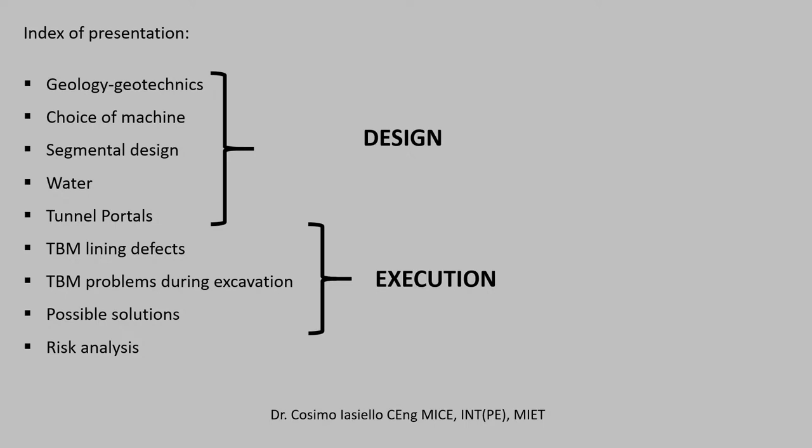Okay, first of all, the geology. I am a doctor and civil engineer. I have a background in geotechnical and structural engineering, so I'm not a geologist. But geology is not only an input; it's the input. It's the most important data we can have for our design. From the geology depends the choice of machine, the ground pressure, the inflow water, and all the possible problems we can have during our execution of the tunnel, during our excavation — everything is related to the geology.

So in this case, we have to understand the medium we are going to excavate and also its behavior, not only from a macroscopic point of view, but also from a microscopic one, in particular relating to the mineralogy of the soil and the geology of the ground.

This is directly related to the construction. If we want to avoid any problem during construction, we have to read very, very carefully the geological data, and we also have to be assisted — and this is very important — by very good and expert geologists. Everything is there, and the main thing we have to understand is how and when to implement the different geological models and different geological characterization: when, during the design, during the excavation, during the detail design, and whenever, and who should do it.

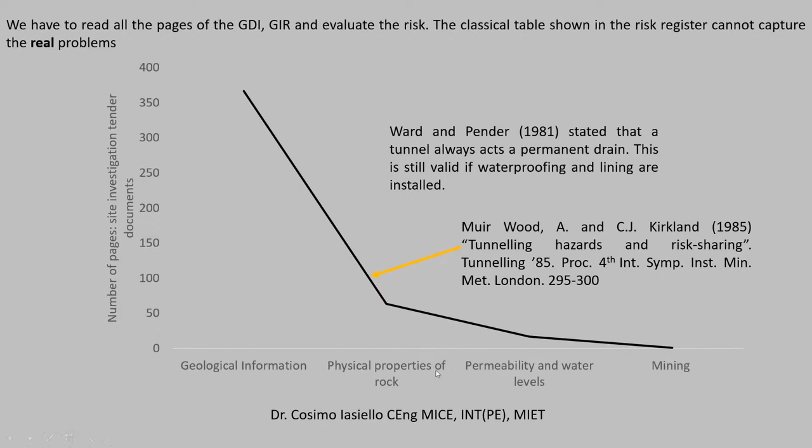So in general, this is the distribution of pages in a geological appendix, and actually our job as designer or design manager should be to improve this and have a better description of the physical properties of rock and their permeabilities.

Then there is something else important: normally the geological or geotechnical investigation comes from someone who is not precisely the underground engineer - I mean, not the person who finally has to do the calculation and the design.

In particular, in some cases we can use windows, like boreholes, to inspect and check the distribution of different strata, and also to capture the extent of this strata relating to our tunnels.

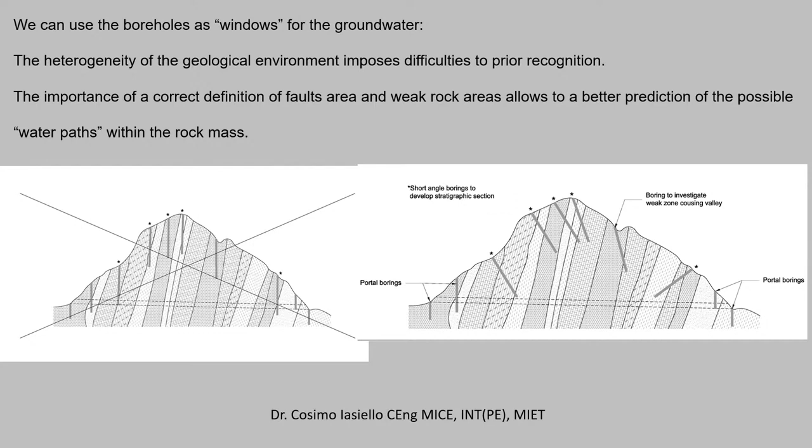So in some cases it's important to have a word with the people doing the geotechnical and geological investigation, to bring our own criteria, because we are going to use these parameters and permeabilities. So it's important to be in the loop and have a say on it.

In particular, relating to water: the water inflow is really important to set up in our design, because it's not only interesting for the choice of the machine, as we can see later, but also for the design of the segments.

It's very important to have a correct understanding of the inflow, or of the watering process of our segment, and then in the long term we are going to establish the design water table. This is very important to bring into account.

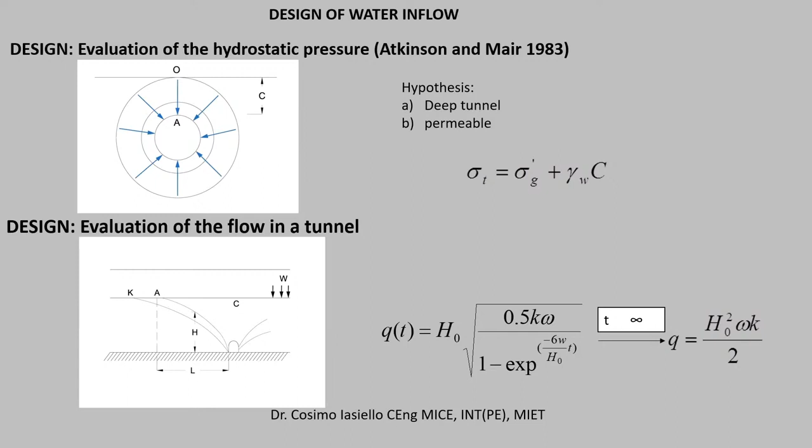Here I bring some analytical formulas. The first one is Atkinson and Mair, which you will find in the bibliography, and the second came from a very old book, The Art of Tunneling, by Széchy, from the 1970s.

The other issue we have to understand is that our ground, whether rock or soil, is not isotropic. Its behavior cannot be efficiently reproduced with an isotropic model - it's something very anisotropic.

So this anisotropy can be translated into parts of our tunnel where we expect more water inflow compared to other parts. It's important to understand and know from the geological information where these areas will be, and how to cope with a good solution.

For example, in this slide I bring the solution given by Alberts and Gustafson for a Swedish tunnel, built mainly in granite, very fissured or weak, with very vertical discontinuities, which they treated with grouted material. This is one solution - there are thousands of solutions, depending on which type of machine we can use, whether we can carry out injection from the machine or have to use some other type of treatment.

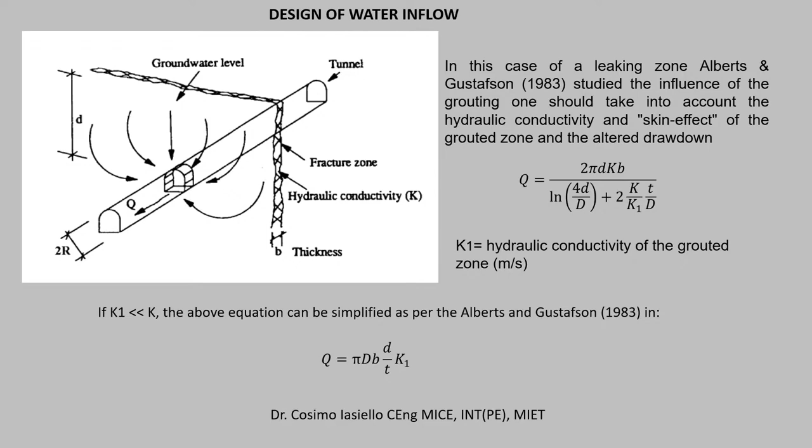The geology - the results of all this data, the water inflow, the possible discharge or flow in our tunnel, and where we'll have these critical areas - has to be translated into a longitudinal profile. This longitudinal profile has to contain everything. All the information has to be collected clearly, so everyone from the geologist to the structural engineer can read it efficiently and easily implement it in different designs.

Then, to better understand the real behavior of the excavation, you can also carry out modeling - whether 3D, 2D, or very complicated modeling.

Bear in mind that modeling is a tool. All the time you have to have with you a pen and a piece of paper to carry out your hand calculation, and then compare it with your modeling. Your modeling is just a tool, but it's very powerful.

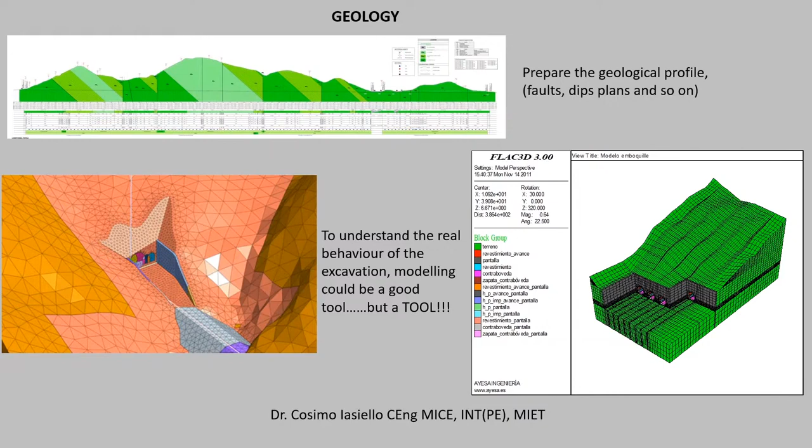And right now, with the increment of finite element software, you can carry out very complicated 3D models, like in this case with the portals, which is very interesting and attractive to model in 3D analysis.

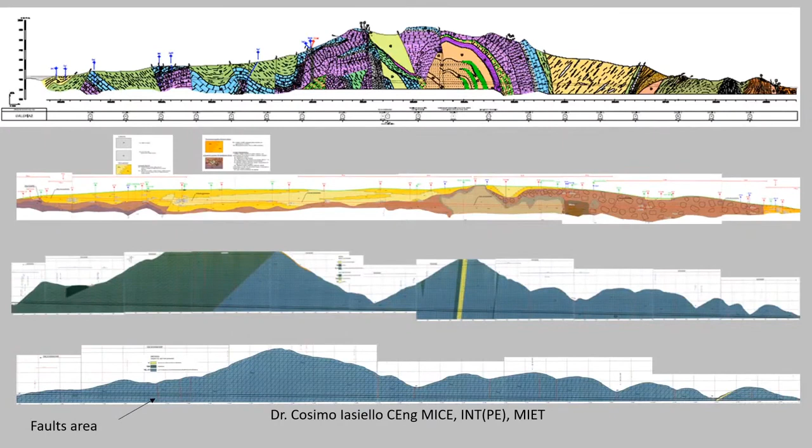Okay, these are some examples of geological profile. I would say not geological, but geomechanical profile, because you don't have only the geological information, you also have the geomechanical information, the depths of the strata, the influence of water, the parameters you have to employ, and so on for different cases.

Just to show you how your tunnel will be, in only one go, in only one window. This is very important to have a better understanding of what we are going to expect.

These, for example, are the fault areas. I'm sure I'm not telling you anything new, but it's important to underline that this data has to be reproduced at our best with all the information we have.

Now, the first question someone has to ask is: is the TBM always the good choice? No. In some cases, the criteria based on tunnel length alone is not valid.

In general, in the tunnel industry, we have the classical graph, which I didn't include because I don't like it, relating tunnel length to whether we should use TBM, drill and blast, or other methodologies.

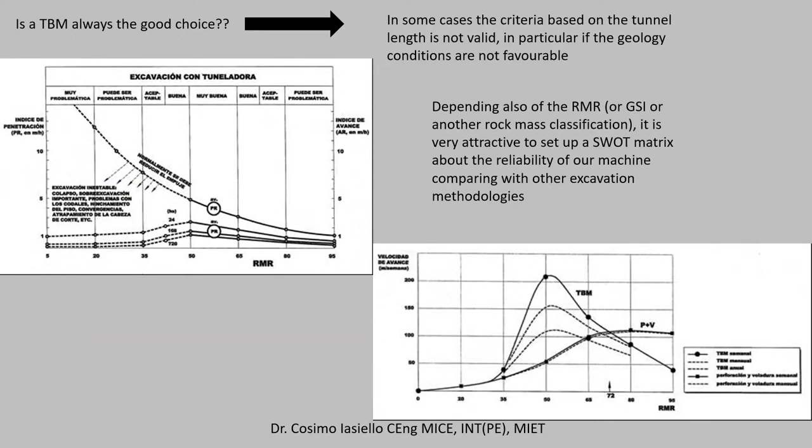It's very important to carry out a SWOT matrix about the reliability of our machine, because we have to understand the worst situations where our machine is going to work, to have a better idea of the real production of our segments.

Then, imagine for instance that the TBM is the good choice. We have to do the TBM selection, and here there are very clear criteria. The criteria is based on which type of ground we are expecting.

If it's hard rock, we use grippers. If it's rock, we can use for example the mono shield or single shield, depending on the classification—if it's very good rock like grade 1 or grade 2, or fair rock, grade 3, we can use the single shield, or go with a slurry. The slurry can be shared between rock and soil conditions.

And if our ground is under the water table, we don't have more options than using an EPB or a slurry, or a mixed solution. The EPB works differently—the first two, hard rock and single shield, don't have the possibility to push.

They don't have the possibility to have pressure on our face, so they are working mainly differently. In the case of the shield, they're working mainly by supporting the backs on the segmental rings, and in the case of hard rock, they are supporting by the lateral head walls of the tunnels.

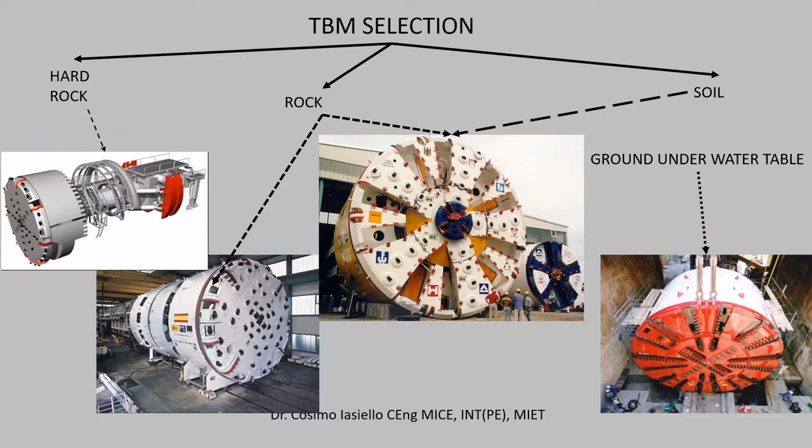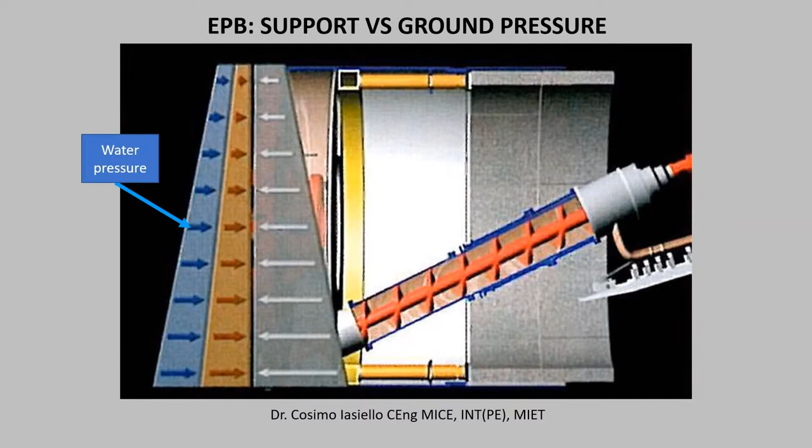For the EPB, we have the ground pressure plus the water pressure, and this is balanced against the pressure at the face, which means that in the area of the face we are working in hyperbaric conditions, more than atmospheric pressure. So we have a stabilizing pressure, so our front is not going to have a problem of stability.

The Slurry TBM is more or less the same. The only difference is between the forms, in one case the EPB, in the other the Slurry, and in case of the Slurry, pressure is applied if we want to use it.

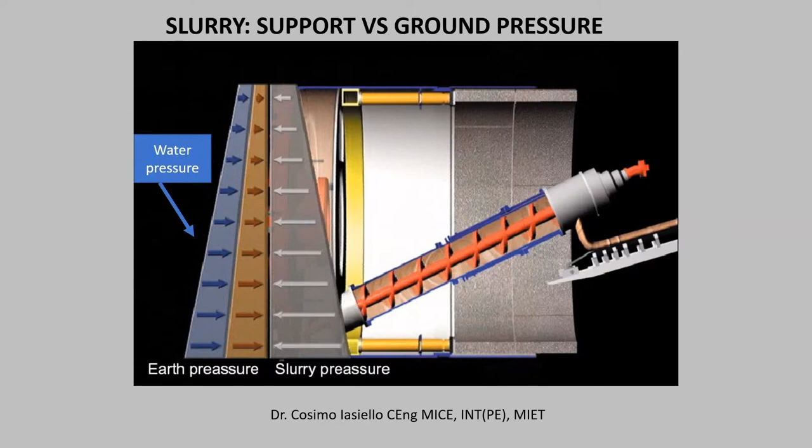Right now there are other TBM manufacturers studying EPBs that can work like a Slurry or like a pure EPB. Now, where to employ a Slurry and where to employ an EPB depends on the permeability of the soil.

If our ground is quite open or a granular material, we can use a Slurry without any particular problem. If our ground is more silty, more clay, more closed or more cohesive, we should use an EPB because we need to penetrate more, and so we need to mix better the ground we are going to excavate.

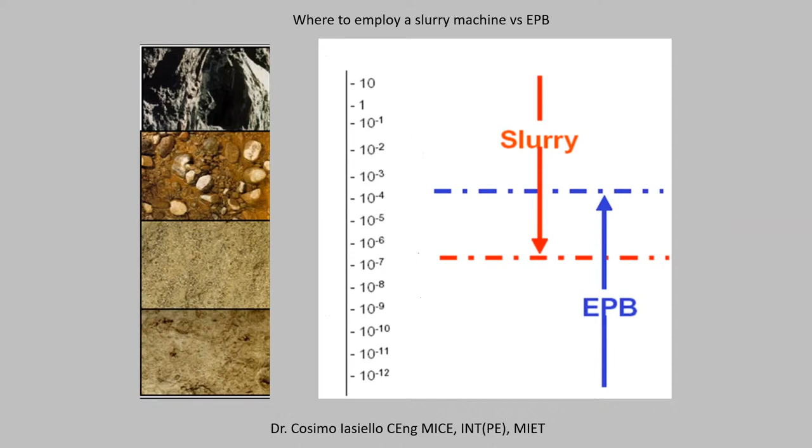I also bring some classifications and definitions from different manufacturers about tunneling equipment, because what I mentioned is like a general rule, a general rule of thumb, but it's not absolute. We should also understand, depending on which manufacturer, which TBM or which EPB is better for our ground.

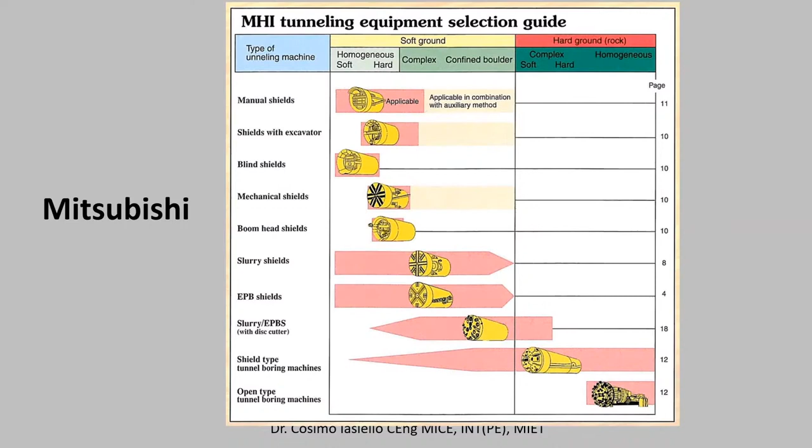So there are some cases - I bring, for example, Mitsubishi, and Kawasaki - depending on the soil models and the permeabilities, the water permeability. I mean, here water permeability refers to the permeability of the soil.

So depending on the case, we can use a Slurry, a mixed face or mixed shield, and then we can go from TBM to other face pressure TBM types.

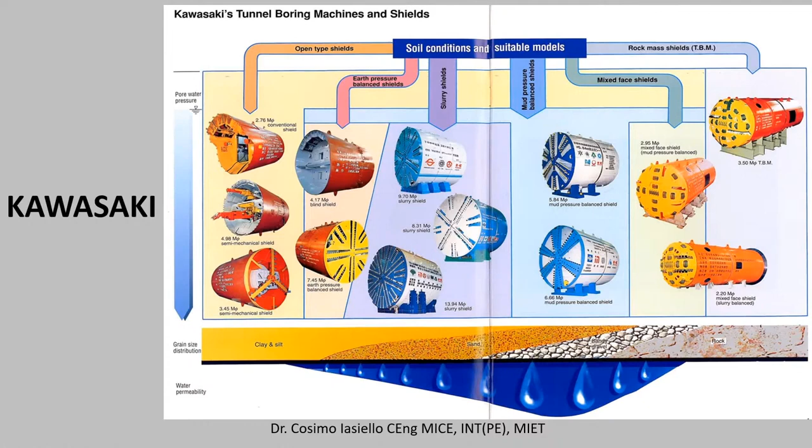It can work like a TBM if you have rock, then we can install elements for putting pressure, and it can work like a Slurry, or depending on the ground we find, it can also work like an EPB.

There are some studies on that, in particular Herrenknecht and what was Lovat - right now Lovat doesn't exist, it's Caterpillar. They are working in parallel, because they are competitors, towards this type of machine.

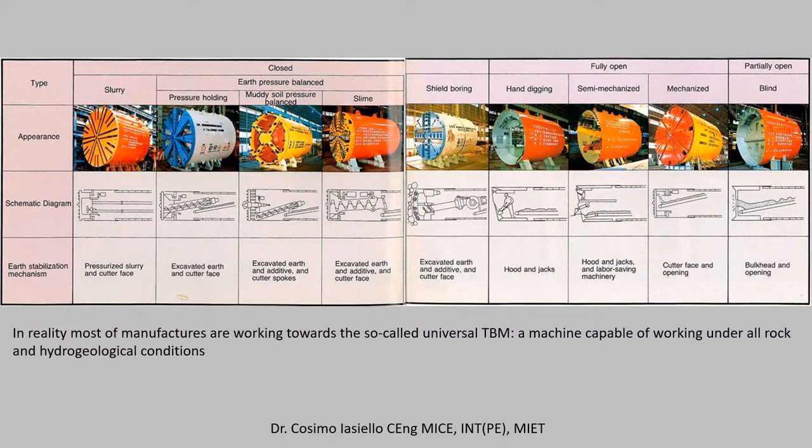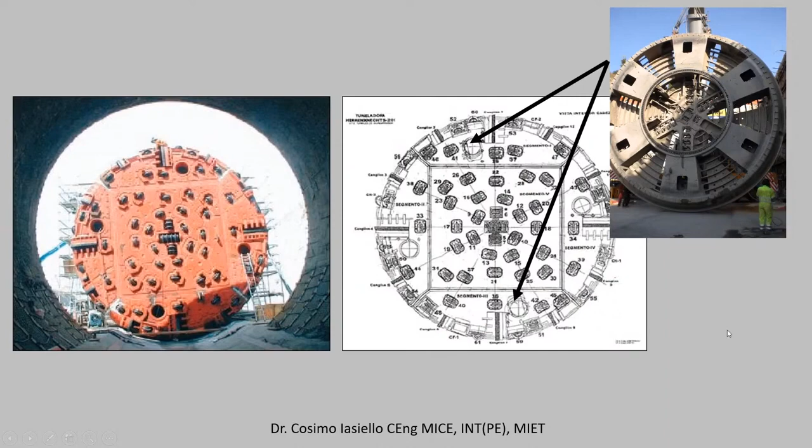Now, for example, this is a TBM for rock. This is a photo of the TBM. This is when the TBM was passing through a NATM, the New Austrian method tunnel, because we had to cross a very small tunnel, so we decided to bring this TBM. This is the face, this is the same face, and this is when they are dismantling the TBM - a view from the back of the head.

Now, if you choose a TBM, for example for rock, and do not consider the possible water inflow, you could have problems during excavation - your machine is not able to excavate the rock because of the water, so your cutters are sliding on the face. You can push on your backs with the jacks, but you can't work properly because you have water pressure, and this pressure of water is not balanced, so your TBM can't work.

Sometimes the solution is closing the so-called windows. These windows are possible to operate and install cutters, also to inspect the front face. Whenever closing the windows, you can work on it and give a small pressure to the TBM, enabling cutters to attack the front and excavate.

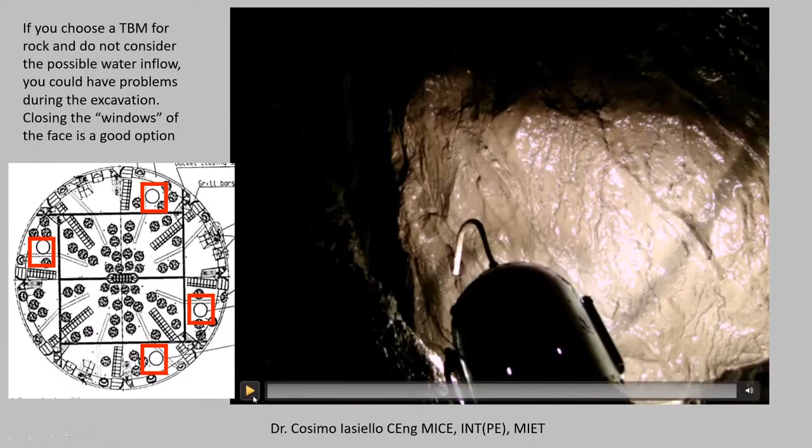This is exactly what happens if you have water. This is a view of the front face, and you have the water here. This is a fault area, so you have really high water. In this case, you have to close these windows. This is a very rigid method, the TBM, so you can't do an injection of the front because you don't have the possibility to access it.

Another issue is choosing a good set of cutters to avoid problems during excavation. For example, right now the cutters we usually use in our TBM are 19 inches. Not all manufacturers can provide this type of cutter rings, so we have to also study the possible abrasion, maybe with the Los Angeles index or other parallel tests on our rock and ground. If, for example, there are mineralogical elements like silicium or others which can produce a lot of destruction of our cutters, we have to take that into account.

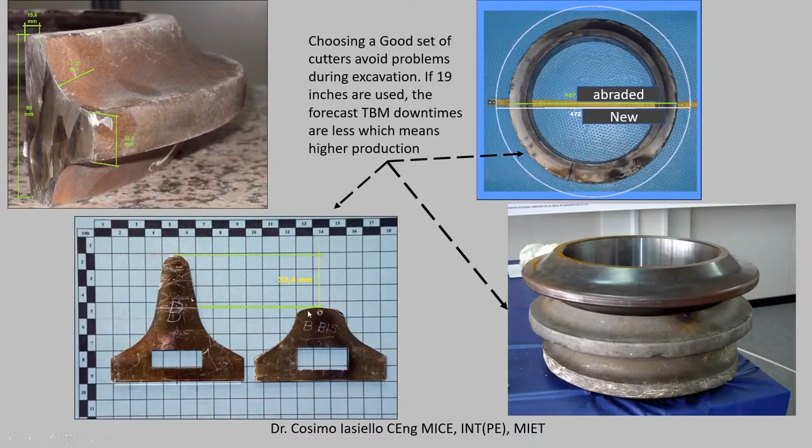This in particular is the installation of cutters. As you can see here, we have a reduction of cutters. Once we install the cutters, we have to check from the windows, in the case of the TBM, if these cutters are in line with our face. Otherwise we can have a problem. In particular for TBM, we can excavate a not very vertical face, and we can have problems in our pushing and in our segments. This is an example.

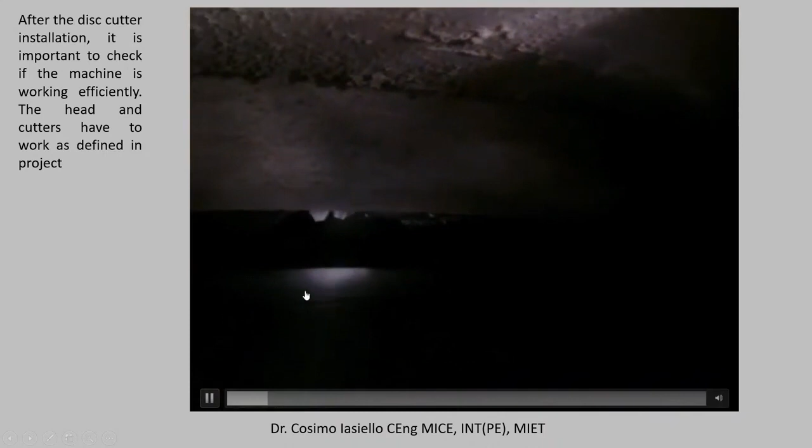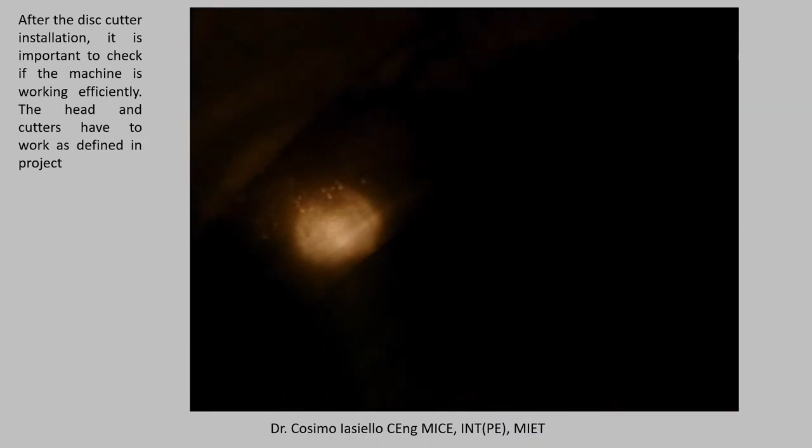So this is what I was referring to. It's normal that it has to be not perfectly vertical, but should be as vertical as possible. Otherwise, if this cutter is not cutting, the equivalent pressure of the machine can be a real problem to our segments, and also to the performance and advance rate of the machine.

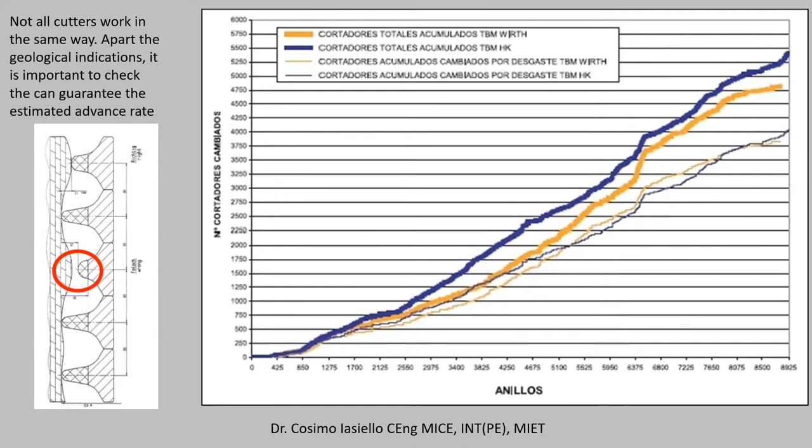So this is an example of the number of cutters changed versus the number of rings. As you can see, once we change the first set, the number of cutters increases quite high, and we have to control that this tendency line is more or less linear. We also have to check if we're facing other problems—maybe too much pressure on the back of the rings can push our cutters too much, so they can overwork, and this overworking can lead to a shorter life of our cutters.

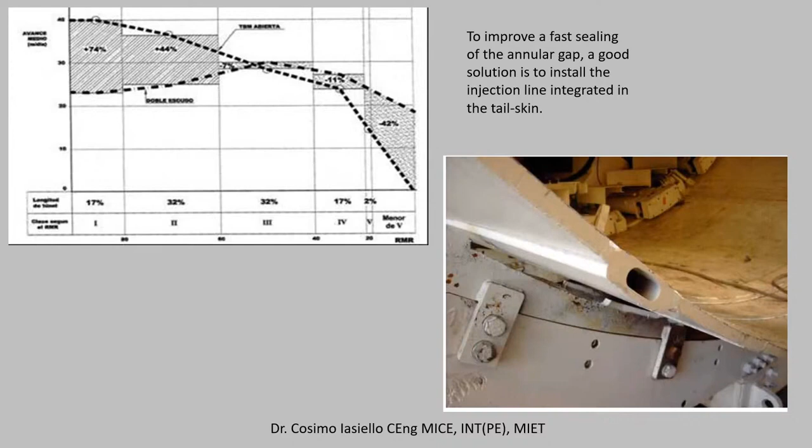Another option to improve our design is the so-called fast sealing. Fast sealing means having the injection line behind, which fills the gap between the TBM and the excavation directly on the shield. So once the TBM is advancing and our ring is in contact with the ground, we will already have our completed section. This is very important to control deformation of the segments and avoid structural problems, but also for durability, because our ring will work better from a water tightness point of view.

Now we go to the design. Once we have chosen the machine, we go to the design. Which loads should we consider in a TBM analysis? The ground loads, the pushing from jacks to ring, the construction loads, the water load if it's present - not all tunnels have a water load - the earthquake, the fire, and any other load derived from particular conditions.

One very important point: which load combination we have to use if we are fulfilling the standard requirements, Eurocode 2, maybe Eurocode 7, but we do not have a particular Eurocode for tunneling. This is also an open problem in European standards, but also in all world standards, because the only standard we have regarding TBM analysis is the Japanese standard regarding shield tunnels.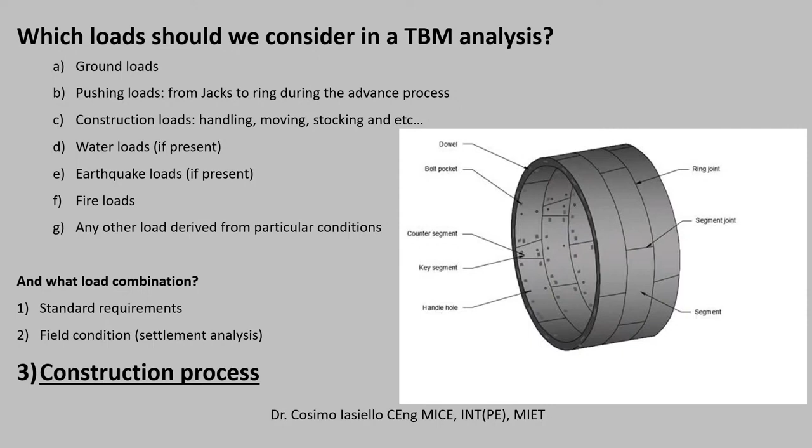And then the field conditions, for example the settlement analysis, and the most important is the construction process. Once we decide which machine we have to use, which type of cutters, where we have our injection line, and when the injection line will work and fill completely the annular gap, we can provide a good or reasonably good design.

So, in general, in TBM tunnels we have two types of joints. The circumferential joints, which are the joints between different segments of different rings, and the longitudinal joints, which are different joints between different segments but belonging to the same ring.

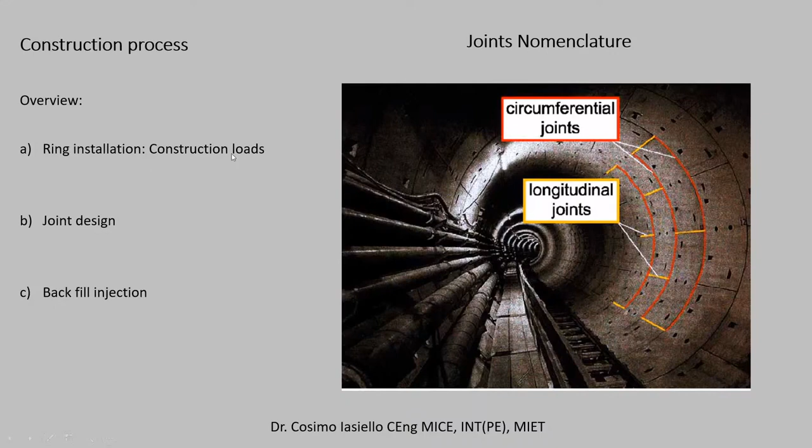So the construction process normally comprises the ring installation, which involves the construction loads, the joint design, and the backfill injection. So the first step is to understand when our ring, our segment, is going to receive the loads.

Normally I use the ground reaction curve, or the confinement curve - I'm accustomed to using it, but other designers use other typologies, for example the number of stability or others. There's no problem to use those. In my case I use this one because it's the most reliable approach for circular tunnels. This also works very, very well.

So the deformation of the shield is between - this is our reaction curve. We start from the geostatic condition, and then little by little we come to our front face. Front face is this, the front face of our tunnel. So the difference between delta 1 and delta 2 is the deformation due to the shield, and from delta 2 to delta F is the final deformation, and this is what we have to collect with our ring, with our shield, and then take into account in our design.

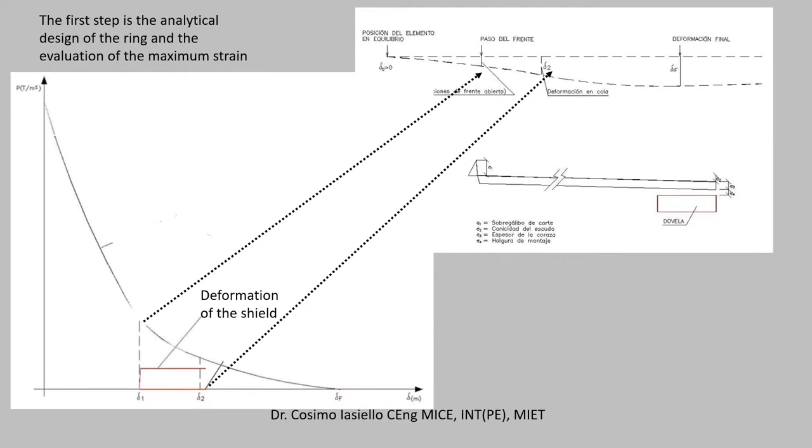Then the construction process: the first is the ring installation. So this is how we create a ring. This is a classical ring with steel reinforced rebars.

Right now there is a new tendency of substituting the steel rebars for fibers. Fibers are very good. We have to check that during the construction process we should check also whether the pure fiber ring is working or not.

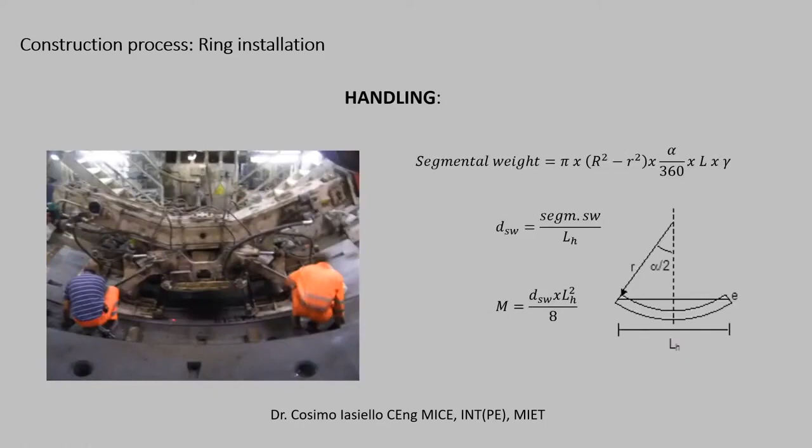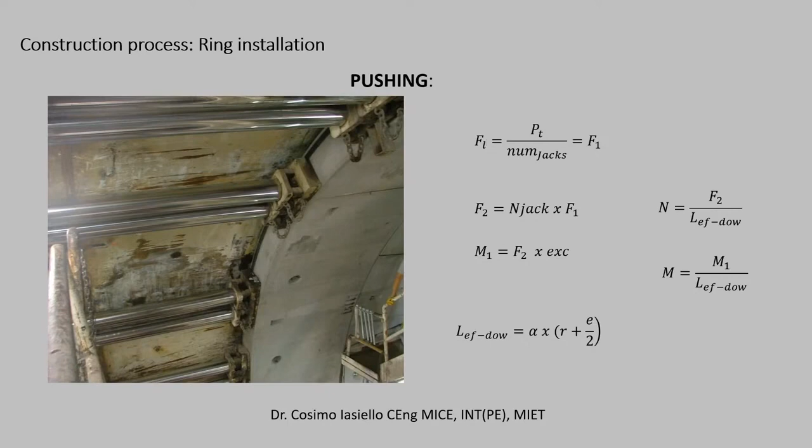These are the formulas we usually apply. This is the stocking - I'll go fast because you know these things better. This is the handling, where you're working with the vacuum and putting it in place during your tunneling, and this is the pushing, when you push your ring against the others, creating a pre-compression along your ring that's capable of maintaining and keeping the circular form.

The joint design is quite more interesting because it's a pure structural element. The joint design ensures the connection between segments and between different rings. The geometry of the joints is a discontinuity region, so it should be analyzed accordingly. And the rotation of the joint must be evaluated, as it directly affects the waterproofing system.

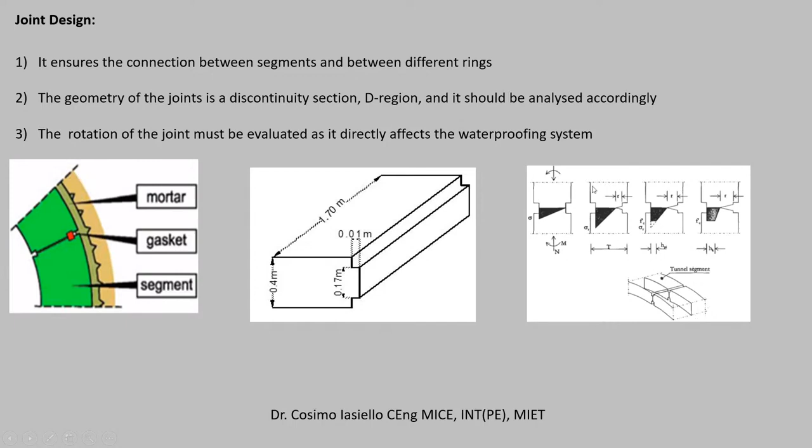So we have to analyze different approaches for the joints. How can we do it? Normally during the design, we can use the approach of Sagaseta, or Verrujit, or Gladwell, Jansenn. Here I bring some of them, and this is the equivalent beam.

It's basically substituting and changing the joint area for an equivalent beam, provoking the reduction of thickness of this beam, and providing this in our numerical analysis. We will go back on it later.

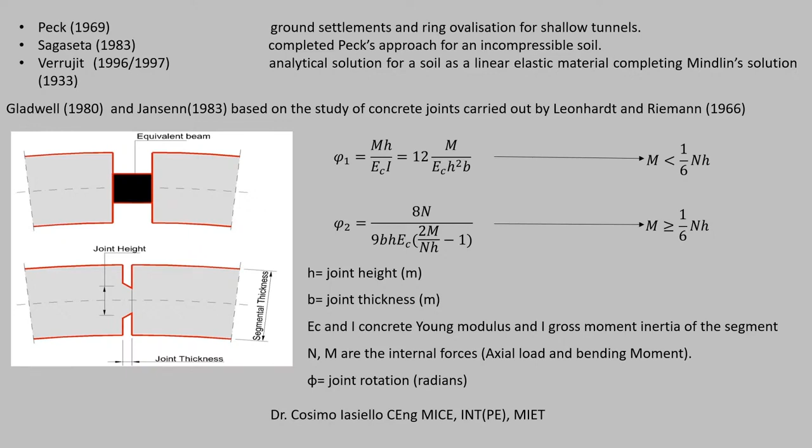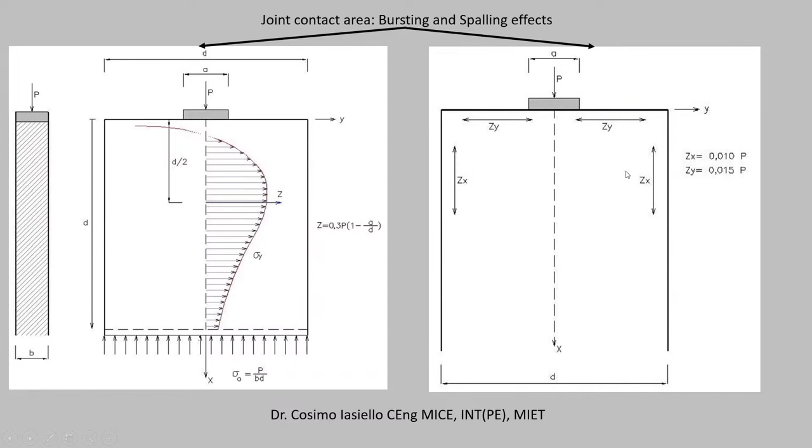There are also other checks we should do, the bursting and spalling effects. Here they have the classical closed formula, based on Leonhardt, so I don't have to explain to anybody how to do it. The only thing is that if we have bursting and spalling, we have to check that, for example, our fibers and the concrete are capable of resisting the bursting and spalling effect. Normally these are the most onerous checks for fiber reinforced rings.

Then we have the fire analysis. This is normally done with the approach of Eurocode 2, the isotherm of 500 degrees, which is a very good approach, in particular if our ring, as happens in say 85% of cases, is working mostly under axial load. So it can be a very easy and quick check.

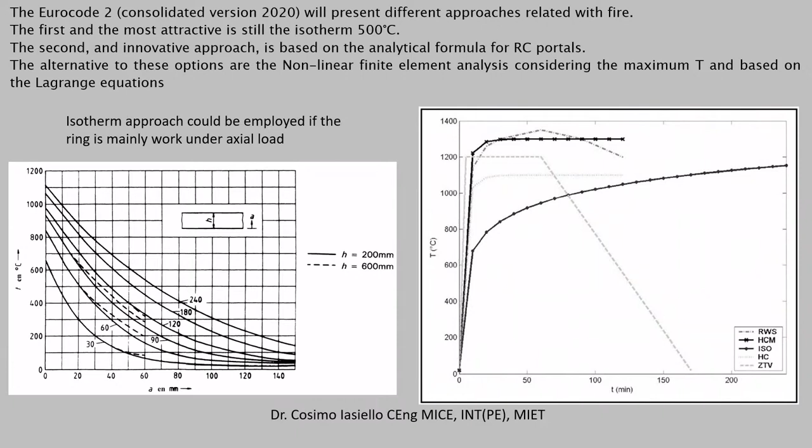The latest version of Eurocode, the consolidated one, states that we can also use the formula based on the portals, which is also a good option. Personally, sometimes I do a transient analysis, for example in this case in Flac, which is quite easier to do than in other software.

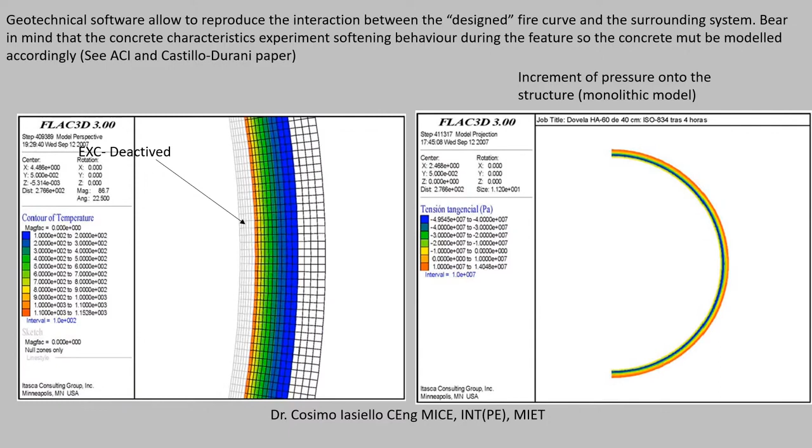So we can efficiently reproduce the design and fire curve very quickly. In this case, these are the internal forces due to the fire loads. This graph is very important; it's the distribution of compression and tension along our ring, as you can see, which is more or less constant.

The implementation of fire analysis brings a lot of compression, which normally is not a problem because our structure can work in compression since it's a closed ring. But it also brings tension, and this tension is most dangerous because our ring is not working properly under tension.

This can lead to an increment of the bending moments, so we should compare this with, for example, the method of the isotherm in some cases. Also this method is used with the gradient. Right now it's quite easy to do. If you use Flac, it's very easy; if you have Midas, maybe it's easy too. It's more or less the same.

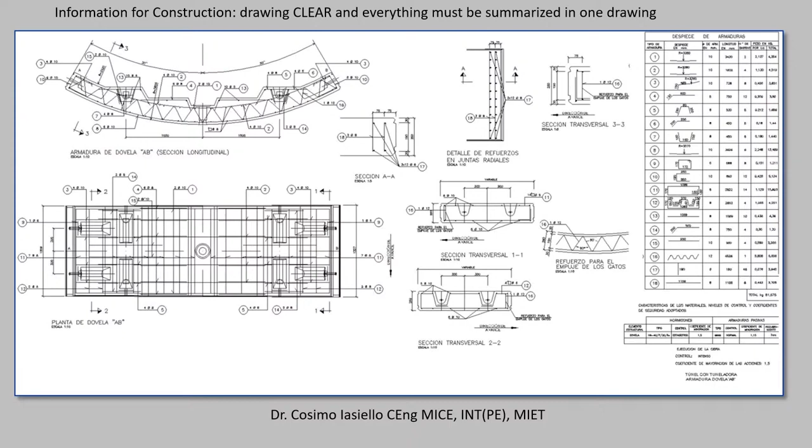Then at the end of the day, this is what we are going to produce. We send this to our construction team or to our client, whoever it is. It's a drawing where we reproduce all the rebars and their position, the quoting and quotation, and whatever else. This drawing has to be very clear because it has to be read by someone who then has to build it, so it has to be clear without any doubt or repetition, and it's important to keep all the information in this drawing.

Now, this is the ideal world. In general, in tunneling, particularly in TBM, if the choice of machine is not properly good, or if we have problems because we do not know the geology or geotechnical conditions, we can have problems in our lining. The Japanese Society of Civil Engineers in 2006 provided a category of TBM lining defects.

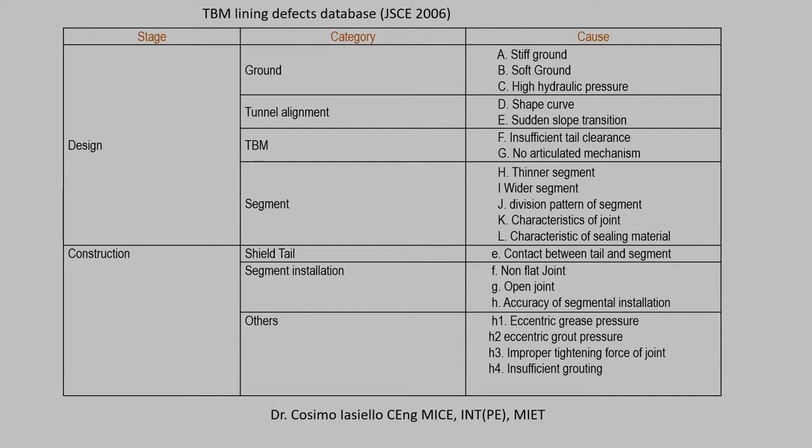This table is also collected by Sugimoto, and they identify the stage, if it is design or construction, the category, which type of ground, tunnel alignment, TBM, and so on, and the cause, but they do not identify the remediation or mitigation measures. This depends on the site and the tunnel, so there isn't one solution for one problem.

So the first problem in TBM linings comes because we are using the equivalent beam model. This model can be used once our ring is already installed and working as an annular, circular form. During construction load, we cannot use this system, and it is dangerous to use the equivalent beam approach, so we have to carry out a proper structural approach.

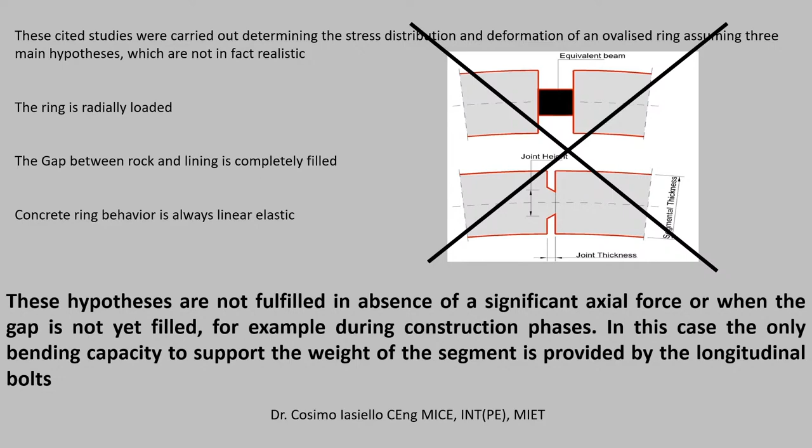Because if we are not completely fulfilling our annular gap, as happens in most cases, since this annular gap is not filling in one go, it's filling normally in 1, 2, or 3 steps, the ring is possible to expand laterally, creating ovalization, and the ovalization of the ring creates cracks in our ring.

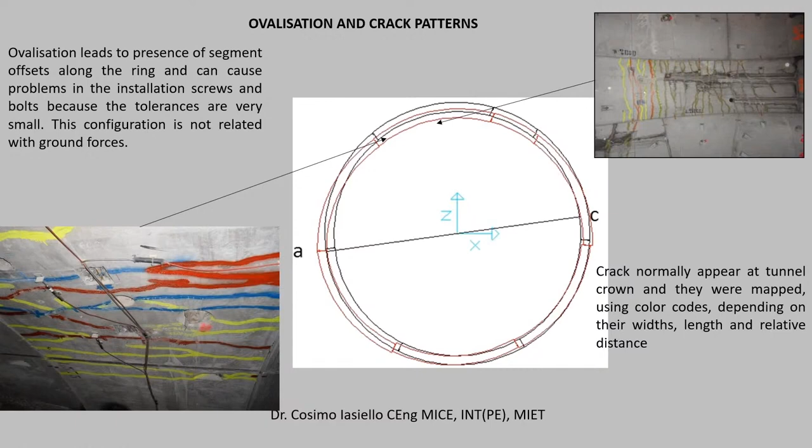Normally cracks appear at the tunnel crown in this area, and then in intrados we can see these cracks, but also we have cracks on the outer side of the ring. Evidently we cannot see it, but theoretically the deformation should bring these cracks also.

How we can simulate it during our design is we can simulate an equivalent beam, but considering only the bolts acting like rebar in our analysis, and providing here an equivalent spring which is capable of rotating. This will efficiently reproduce the distribution of the bending moment along the different joint sections, which is capable of redistributing the internal pressure.

Actually, we carried out in a paper a comparison between the measured values on site and the values calculated in our structural assessment, and we reached more or less the same value.

Another issue we have seen in many designs is that construction loads are not taken into account, and people use the hypothesis of Wood, which reduces the inertia of the ring due to the presence of joints. This is a good approach, an analytical approach, and it's valid only for analytical calculation.

The ground reaction curve or the convergence confinement curve is not valid for finite element analysis.

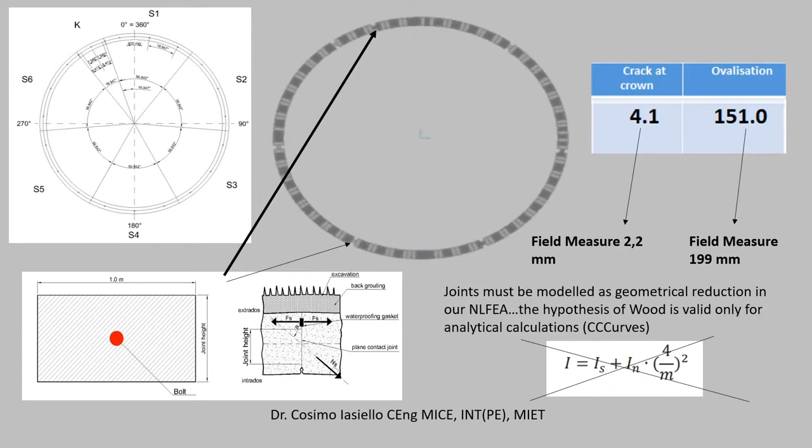The other effects or other TBM problems we can have are the rotations between two different joints. This rotation of joints has a structural problem because right now the stresses are not passing through the center line of our joint, but through a small area. So we have an increment of pressure in this D region.

This normally can be efficiently assessed by a strut-and-tie model, and also we could have problems of water tightness with our gasket.

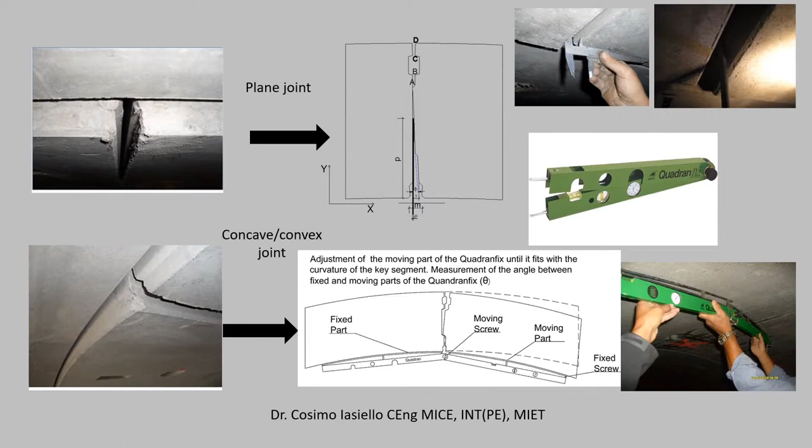Then we have the same problem from the convex side if we are working with a tapered ring. We invented something to measure the ring, and we measure the angular differences and the angle between the fixed and moving part, just to have an assessment of the problem.

And then we have the misalignment. As you can see, the misalignment can have the same problem as the plane joint because it's moving the introduction of our load into this D region. So normally it's assessed with the strut-and-tie model, and in some cases we need reinforcement.

Also, as you can see in this photo, this is a cut of a ring because we had to install here the conveyor belt. This is a problem also for the gasket because it's not in contact as per design, so here we will have a problem of water tightness.

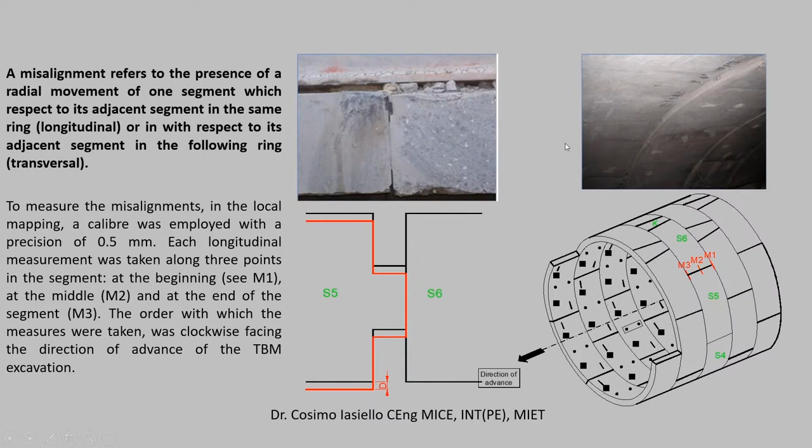And we have the ruptures of the tunnel. This defect is quite common in almost all tunnels I've visited during my life, and this is the most common one. This happens because this area is very delicate, and during handling and installation, they are pushing, and when you push too much, you can create some local ruptures.

Then sometimes during the rotation of the machine, we have the so-called position 0, which is the position the machine establishes over 100 or 200 rings; the normal position is called position 0.

In some cases, we can have a continuous joint affecting more than 2 rings, and this has to be evaluated from a structural point of view, normally carrying out 3D models with the joints to evaluate the distribution of loads in this area. Normally, this has to be avoided.

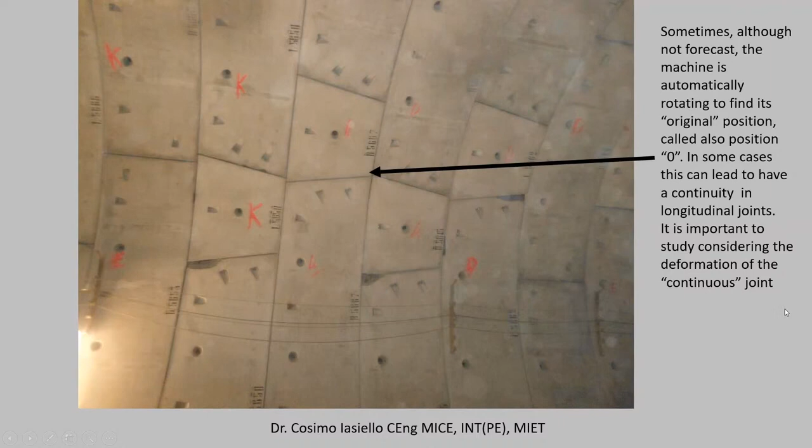In some cases, our ring cannot resist the internal forces derived from structural defects, and we have to reinforce our ring. Remember that the ring is built by means of compression jacks, and demolishing it is not a good idea. So if someone tells you they will demolish this ring, escape. Say no, it's not a good idea.

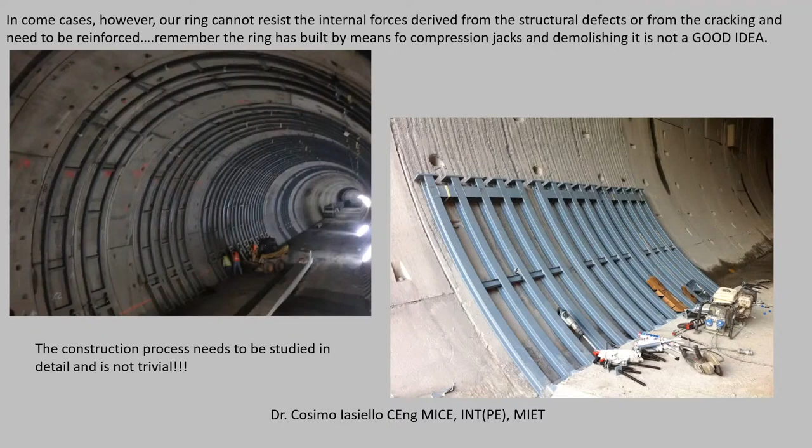So the construction process needs to be studied in detail. It's not trivial, these are means of different sections, and this reinforcement also has to be checked against water, against the waterproofing we have for our tunnel. Because at the end of the day, our tunnel is for something, so we have to check it very carefully. The construction process also is very difficult in this case.

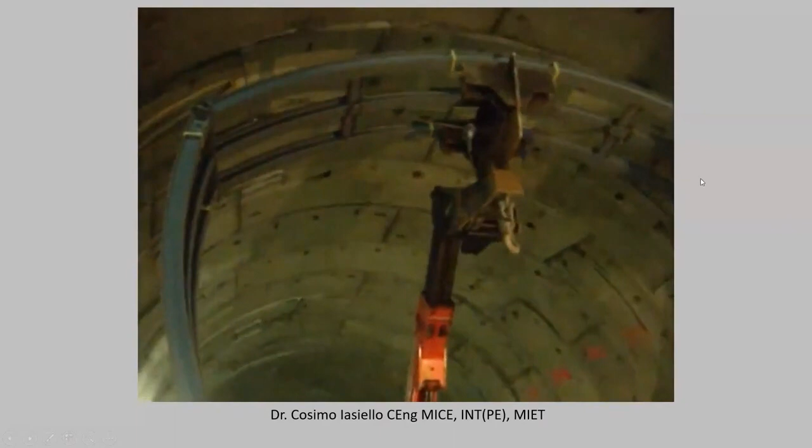I brought some video showing how to do it. As you can see, this has to be done out of the tunnel. We have here some hinges. These are construction hinges designed to allow the construction and then to be installed on the tunnel, and we are able to install this very, very quickly.

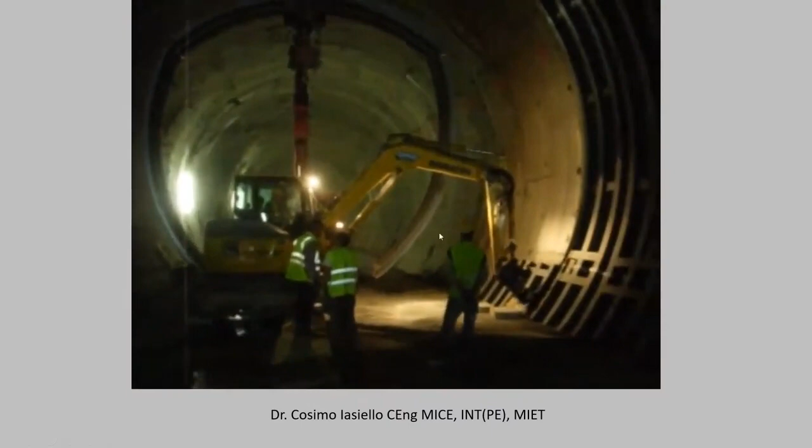As you can see, we open it, and then they move to the other case. This is the one we have already put in place, and then they push it with an excavator because of safety and because this element is very heavy. So they are working without interaction with the man. This also has to be assessed.

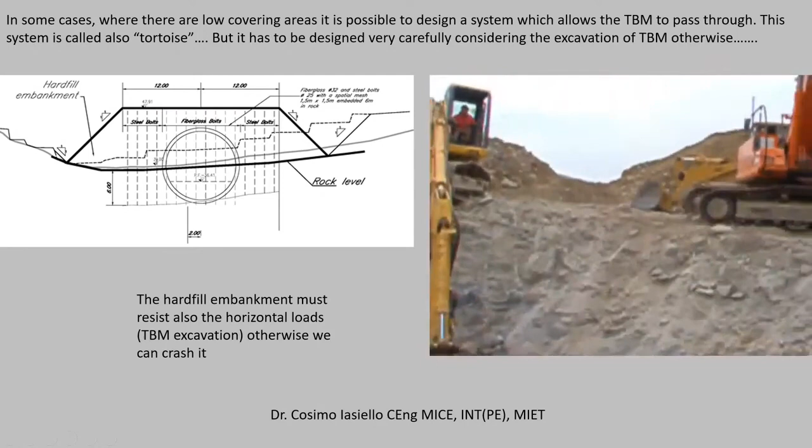This is the machine, and you have this problem because of a failure of the face. Once you are installing, this is the TBM. When you are pushing the TBM, you don't have horizontal pressure, so this is excavating something. This is creating a face failure, and this brings you a very, very big problem.

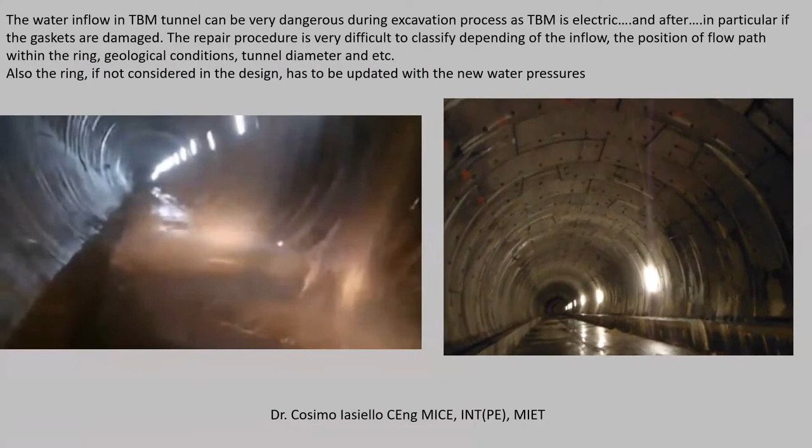This can be something like that, or can be something like 10 or 20 meters of water. You can have your tunnel ready to be used, but you can have this water problem, so your tunnel is not fulfilling the criteria established by you, and so you have to fix it, and fixing it is very difficult and very expensive.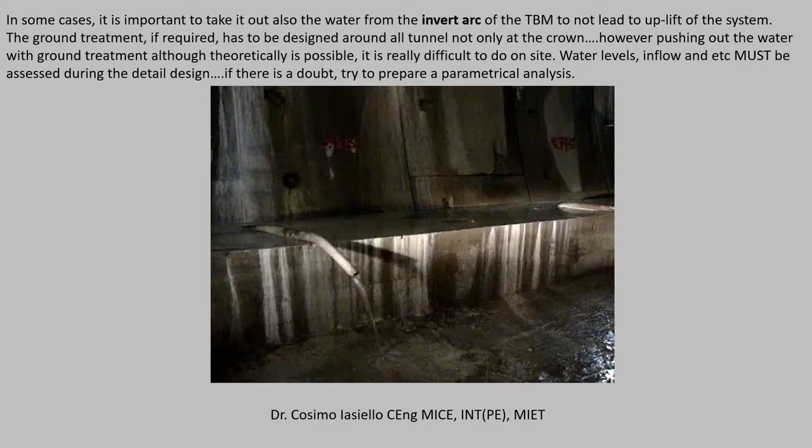Then it is important also to take out the water from the invert arch. In most cases, I see that during our design, we are very worried about the crown of the tunnel, but nobody is taking into account the invert arch of the TBM. The invert arch actually can have problems of heave, of uplift, depending on where it's founded, and we also need to remove water from the invert arch, because it can be very dangerous.

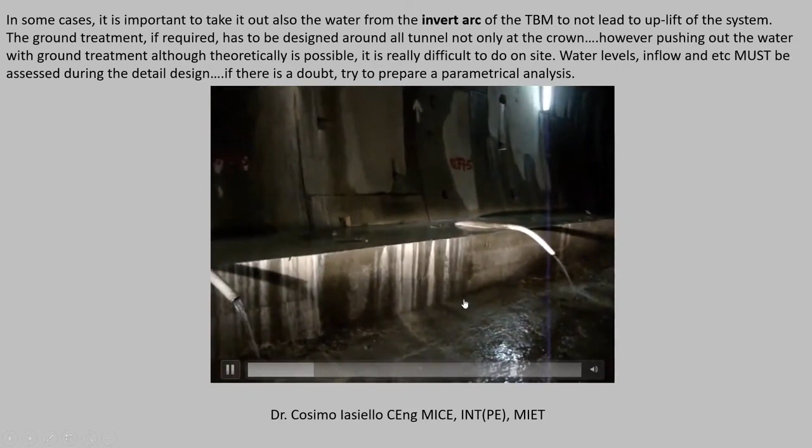Another tunnel, so you have a problem here from your invert arch. So we have perforated the invert arch, and we are putting the water inside the tunnel, and we are taking it out, not outside of this. You can see this in white. These are the first trials of injection.

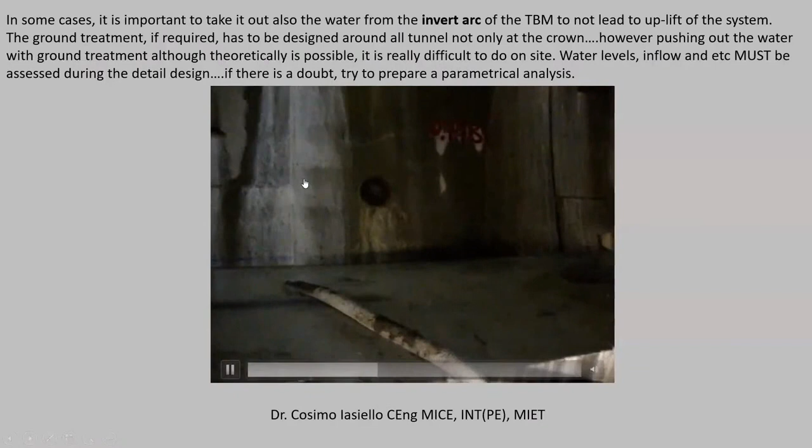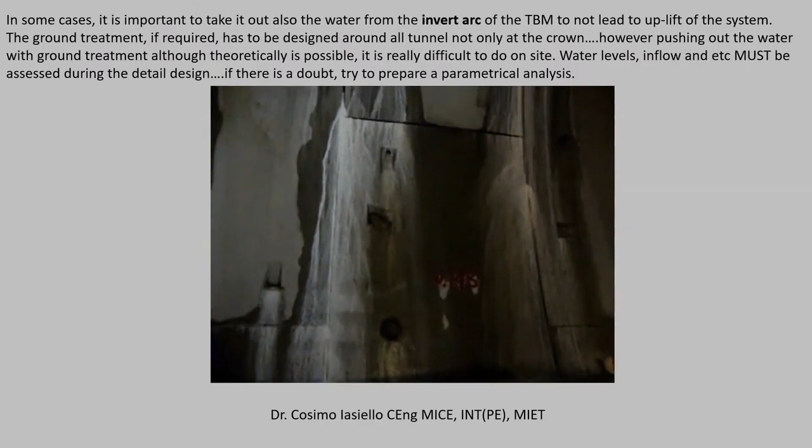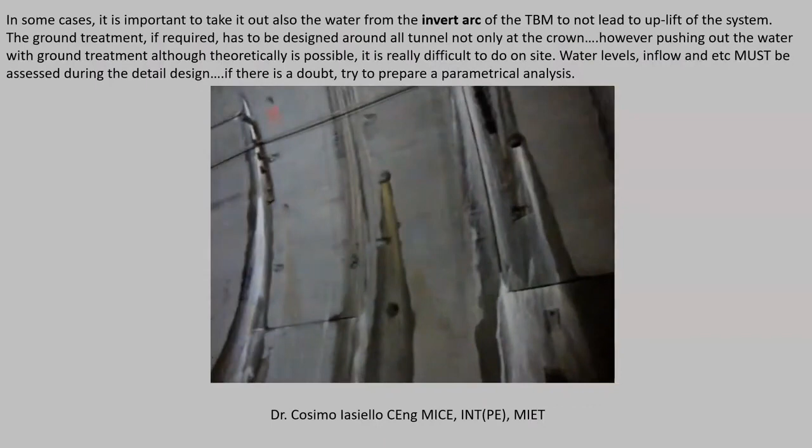Injection behind the tunnel in order to stop the flow. As you can see, we could not reach any good results because of the water pressure and because of permeability. In this case, we then solved it with another option, using a different material.

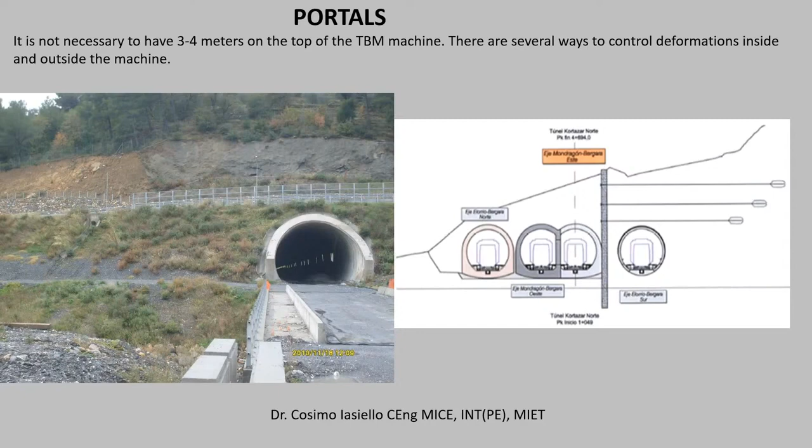Portals. In general, all tunnel design statements assume 3 or 4 meters on top of a TBM machine, but this is not needed. We can tackle this with 1 meter. It is not a problem, particularly if you have it in EPB. Usually we can provide a tension slab on the top, just to avoid provoking any problems to the ground. So it's not a problem.

These are the classical examples of ground treatment for TBM portals, which depend on the country where we are, depend on the designer, and depend on what you as a designer feel more comfortable with as a type of design.

This is an example of a failure of TBM. If you have a rock mass, designing considering the dip direction of the strata is very important. I know it's trivial, but sometimes, as you can see in this image, it's not so trivial.

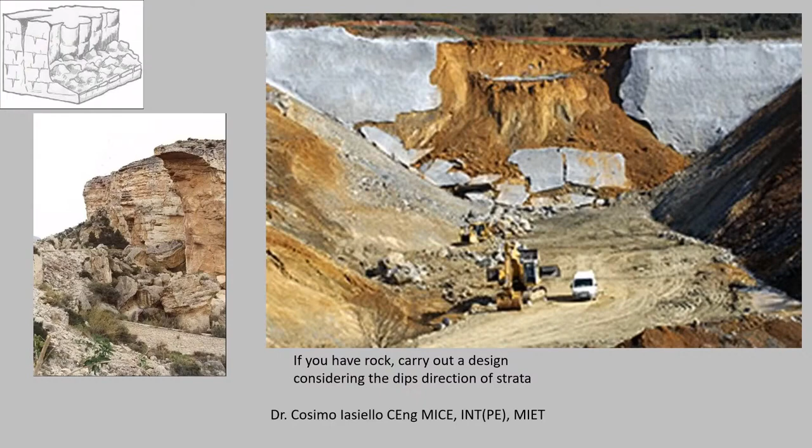Also, do not treat a portal like a normal wall, because it's not a normal wall. You have to consider that you are going to excavate under the anchoring system, if you have one, and you can have detensioning of soil. You have to consider it in detail, and it can be a problem during execution, as you can see in this photo. Personally, I prefer to assess the portals considering the TBM and the construction process, as I mentioned at the beginning of this webinar.

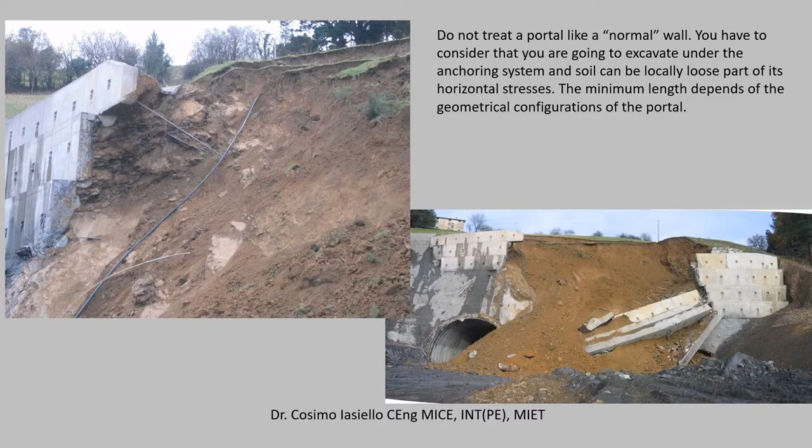This is done by means of 3D analysis. This is something we did here in Spain, on this tunnel. If you have a portal with very bad conditions from a ground and hydraulic point of view, it's useless to start directly with your TBM. So sometimes it's better to attack it with a conventional method like New Austrian, and then once you are in very good rock, you can bring your TBM and install it, starting in better rock rather than excavating very weak rock with the TBM and suffering for it.

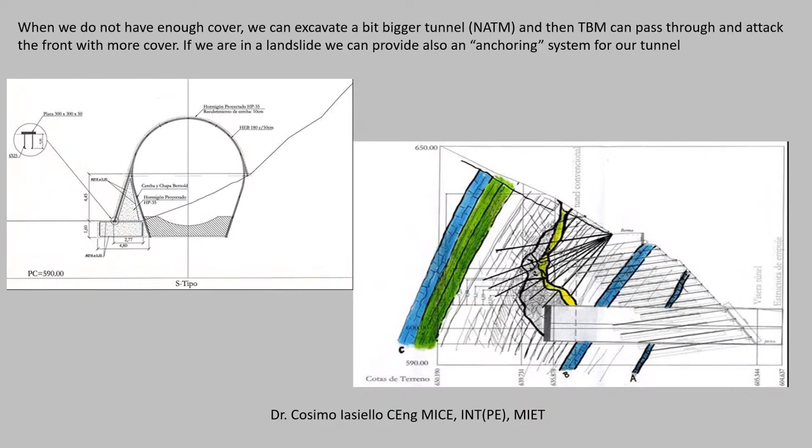Then finally, there is the risk analysis. Normally in Spain, UK, or wherever, the risk analysis is like a color table with green, yellow, and red, considering which risks are associated. We identify them, classify them, and then there is a possibility of solving.

In particular, what I usually do for tunneling, considering my experience, not only for TBM but also conventional, is to present a very detailed risk analysis. For example, if I estimate values of convergence, depending on which type of convergence, I can use different sections or segments 1, 2, or 3. If I have more than the established convergence, I will start with remediation measures, which can be ground treatment, external ground treatment, double injections, grouting, or even reinforcement of the section.

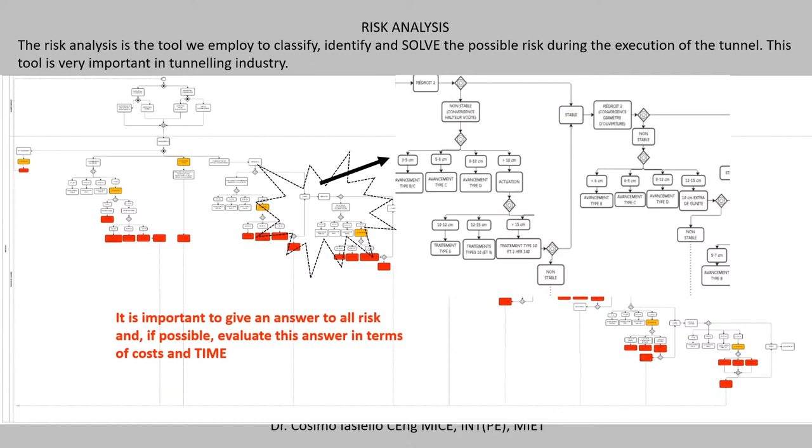This is important for this risk analysis because we should give an answer to all the risks, and if possible, evaluate this answer in terms of cost and time to give the most reliable answer to our client. Our client is not only the construction side; it's also the public client, to have a better idea of what is going to happen. Finally, I would like to give the conclusion.

The conclusion is, first of all, geology is not an input, it's THE input. Be careful with faults, water, and risk. If you choose a TBM, the TBM must respond to the worst geological scenario, not the average, the worst one.

The design of segments is the design of joints. So the joints have to be assessed very structurally, not by geotechnical engineers, but by structural engineers, who must be very proficient in structural calculation. Defects in TBM can occur. You have to know how to solve them and give the correct answer. For this reason, it's important to have a very solid risk analysis.

And the demolition of a ring is not a good option. Personally, I don't suggest it. So if you find water in your tunnel, try to push all the water around the tunnel, not only at the crown, because you can push it out at the crown, but then it can concentrate at the invert, and you can have failure by heave or uplift in your invert, causing problems.